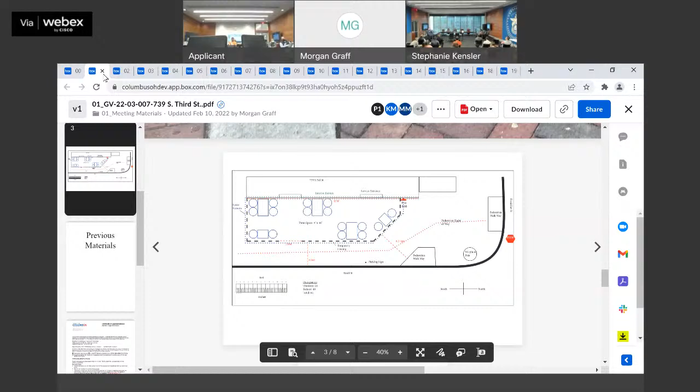Moving ahead to item number 2, GV-22-03-008, 1094 South 4th Street.

If you please raise your right hand. Do you swear to tell the truth, the whole truth, nothing but the truth? I do. Please state your name for the record. Christopher Brunner.

Proposed work is to replace the non-original sliding patio door on the rear of the structure. Applicant proposes to replace it with a white Marvin fiberglass exterior, finished wood interior sliding glass door, but is open to making the exterior fiberglass door dark bronze.

Staff analysis: the existing sliding glass door did not receive a prior COA, but was there when the owner moved in, in 2000. There is a record of a complaint being made in 1992 about a new sliding glass door installation without a COA, but there was no additional documentation.

Applicant originally proposed a vinyl sliding glass door as a replacement. Staff had initially reached out stating that vinyl doors are not approved within German Village and recommended replacing in kind for staff approval, or fiberglass, which would have to be reviewed by the commission. The applicant is willing to use a dark bronze finish.

Staff recommends approval, with any and all clarifications to be submitted to HPO staff for review and approval prior to issuance of a certificate, and that the applicant selects dark bronze or black as the exterior color. This is based on the German Village Guidelines amendments, door replacement, page 179. The following criteria should be considered in determining whether door replacement is appropriate: the door is not original or contributing.

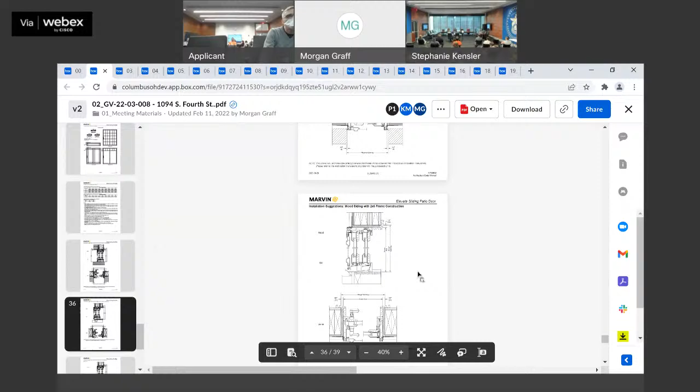Anything else to add? Any questions or comments from the commission? So is this a vinyl or a fiberglass replacement? The replacement would be fiberglass. The current door is, I think, steel. Okay, I wasn't quite sure where we were at.

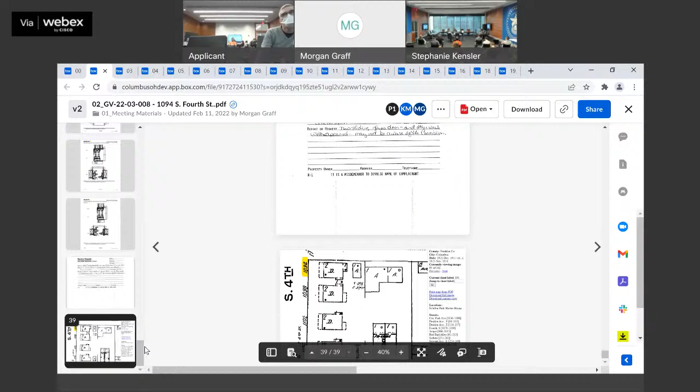I guess the other issue is the color? Yes, applicant is proposing white, but he's open to using dark bronze or black to match what's existing there. I'm not sure why these pictures got flipped upside down, but the question is, why would we want to match something that was not approved previously? And would white be better off? I didn't understand why white would be a problem.

Okay. Yeah, I would prefer the white. Motion.

Mr. Chairman, on item GV 2203-008, 1094 South 4th Street, I move to approve as submitted with a fiberglass door that's white. Second. Questions on the motion? All those in favor? Against? Ayes have it, motion passes. Thank you.

Item 3, GV-22-03-009, 1050 Jaeger Street. If all three of you would please raise your right hands. Do you swear to tell the truth, the whole truth, and nothing but the truth? Please state your name for the record. Joseph Wickham. Thank you. Stephanie Wickham. Thank you very much.

Proposed work description: applicant is seeking a variance recommendation for an existing condition. Code 333226C1, minimum side yard permitted, to reduce the minimum north side yard from 3 feet to 1.8 feet. And 333225, maximum side yard, to reduce the maximum side yard from 5.97 feet to 5.2 feet. Staff analysis: project was approved for design in July, number GV2107047. Staff recommends that commission recommends approval to the BZA as submitted. This is based on the German Village Guidelines, zoning variances, page 139.

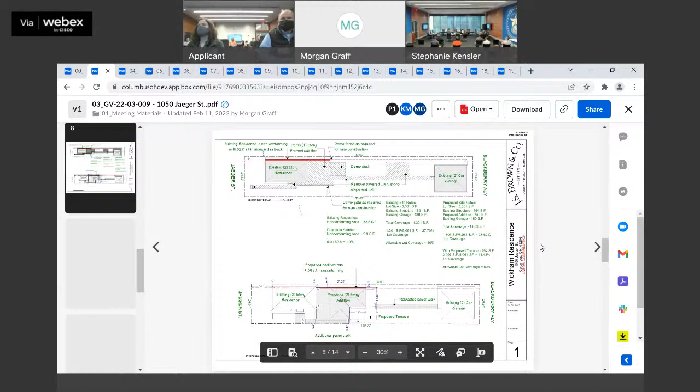Questions, comments from the commission? Mr. Chair, on item number 3, GV 2203-009, 1050 Jaeger Street, I move to approve as submitted. Second. Any questions on the motion? I will ask for clarification, but these are all existing conditions, correct? Yes. Take a vote. All those in favor? Aye. Against? Ayes have it, motion passes. Thank you. Thank you very much.

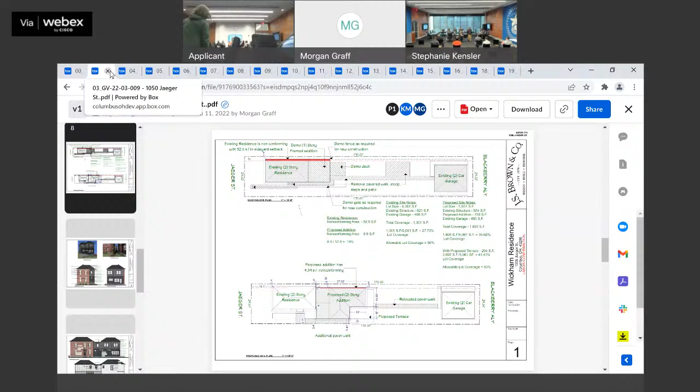On to continued applications. Item number 4, GV-22-02-007, 713 South Sixth Street. And if you both please raise your right hands. Do you swear to tell the truth, the whole truth, and nothing but the truth? I do. I do. And please state your name for the record. Suzanne Vennemeyer. Thank you. Mark Ruthermore. Thank you.

Proposed work description: removal of a blue spruce tree in the rear yard, southwest corner of the house, and grinding down the remaining stump. The tree was planted too close to the house foundation approximately 20 years ago. This posed a hazard to the foundation of the house and needs to be removed.

Staff analysis: commissioners requested at the past February business meeting to clarify if the applicant intends to plant a replacement tree in the same location. Applicant responded stating that they do have the intention of planting a tree in the future, but not in the same location since it will be too close to the house foundation. They plan on renovating the backyard in the future and will address it with that application.

Staff recommends approval with any and all clarifications to be submitted to HPO staff for review and approval prior to issuance of a certificate. This is based on 311613, standards for site improvements, letter. Anything else to add? Questions, comments from the commission?

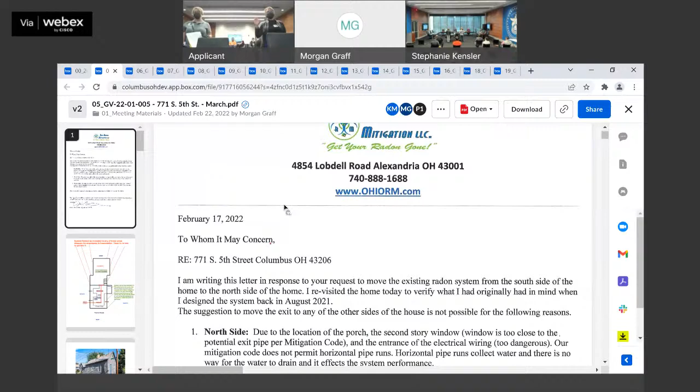You both please raise your right hands. You swear to tell the truth, the whole truth, and nothing but the truth. I do. Please state your name for the record. Jody Rhodes with Ohio Radon Mitigation. Patricia Janikowicz. Thank you very much.

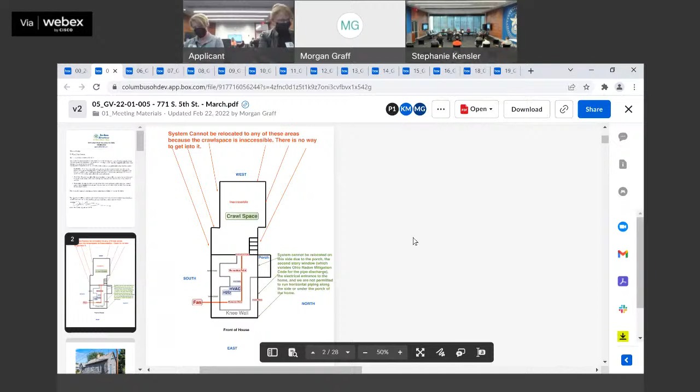Proposed work description: this application is a response to a code violation of a radon mitigation system installed prior to its COA being issued. The radon system has been installed on the southeast corner. Radon level is 10.3 on the first floor of an actively occupied living area. Applicant was told by contractor that the street side was the only option for installation due to the construction configuration of basement walls. Applicant intended to paint the piping the same color as existing shingles on the structure.

Staff analysis, the following is taken from the approved February 2nd, 2022 German Village Commission hearing minutes. Commissioner comments: commissioners asked applicant the reason the northeast corner wasn't able to be used. The applicant responded that the exit would have been too close to the electrical panel, as well as the exit pipe would be too close to the second floor window. Commissioners indicated that the street side is unacceptable for the pipe exiting to be seen.

Commissioners would like to see if there are any other options that could work. Commissioners asked if the pipe could exit the northeast corner, run along the exterior horizontally under the porch, and then exit further east on the building to place it further away from the second floor windows. Applicant could not speak to it at this point, but would consult with Ohio Radon Mitigation.

The commissioners asked at the past February business meeting if staff had received any additional information requested from the previous hearing. Staff informed commissioners that applicant had not submitted any new information and would request that information be sent prior to the March hearing. Applicant has since responded stating the mitigation code does not permit horizontal pipe runs. Horizontal pipe runs collect water and there is no way for the water to drain, which affects the system performance. Staff recommends approval with any clarifications to be submitted to HPO staff to review and approve prior to issuance of the certificate.

With the condition that the PVC piping be painted to match the color of the exterior siding. This is based off of CC 311618. Approvals required, letter C.

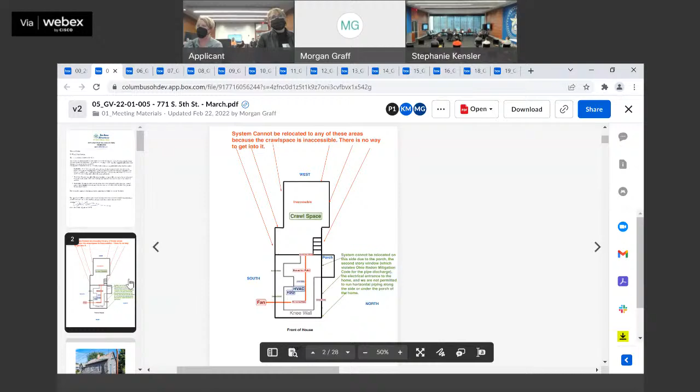And then, even then, the exit would violate our 10-2 window rule for the window on the second story of the house. Well, we were looking at getting it towards the back of the house, which there's a porch in the way. Well, we were talking about going under the porch or over the porch. I can't run the piping under the porch. And why would that be?

I'm not permitted to by Ohio radon mitigation code. That is Ohio Revised Code for Ohio radon mitigation. Can you tell me what that is, just out of curiosity? I don't know the number off the top of my head. We can look it up.

We have very strict guidelines. That's why the design of the system was done the way it was to begin with, because there just isn't any way to get the system exteriorly without violating our code. And if I violate the code and it gets inspected by the Ohio Department of Health, I lose my license.

I believe there is an option for running it up inside the house, inside a chase. That would require a lot of construction. I'm just bringing it up, just saying that is an option. Now, whether the commission wants to approve what you've done, that's up to them.

I'm just saying it is an option. That's a homeowner decision. It would have to be cut through floors, drywall, and roofing, and it would be expensive. I understand that, but it's doable.

My only question is, if we do approve this, I would ask that you contact staff and let them know what the code reference is, so we know in the future, because these things happen from time to time in the village. I can get it as soon as I get back to my office.

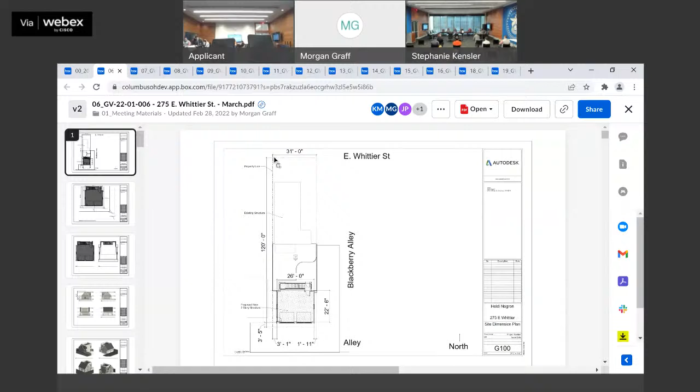Please raise your right hand. You swear to tell the truth, the whole truth, nothing but the truth? I do.

Austin Pope? Thank you. Heidi Negron? Thank you. Tom Stevenson? Thank you very much.

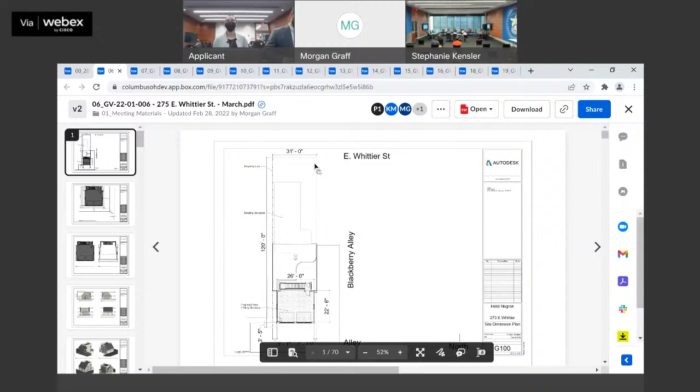Proposed work description: construction of a new 2-story wood frame carriage house, which will sit within the current property lines at the dimensions shown on the attached plans. Height to be 24 feet, below the average height of the adjacent properties which average 24.7 feet, with total lot coverage being 42%. The proposed carriage house will be set back 2.3 feet to align with neighboring properties and allow for a larger turning radius. Redesigned interior stair to be relocated to allow for 2 double garage doors.

These garage doors are to be 10 feet doors and centered on the back of the structure. Windows are recentered to show separation between the windows and the top trim detailing. Doors and windows have been aligned where possible. Carriage house facade will meet German Village requirements: smooth painted lap siding with 5.5 inch exposure, either Hardie board or similar. Windows will be 3 feet by 6 feet, double hung with no grids.

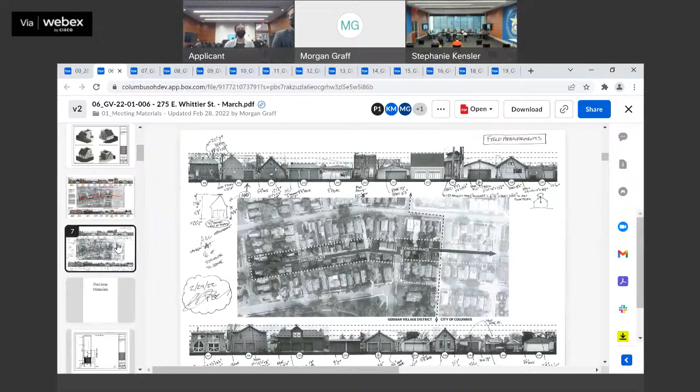Doors will be 3 feet by 6 feet 8 inches, 4 panels with a 1 foot 4 inch transom. Trim details to match German Village standards per submitted drawings. The existing wood fence is to be removed only to the extent of the new structure. Zoning and variances to be discussed at the meeting. At the past March business meeting, the Commissioner asked the applicant to provide verified heights measured by the hired architect prior to the March hearing. That has been provided. The following is taken from the unapproved February 2nd, 2022 German Village Commission hearing minutes.

Commissioner Thiel stated that he will challenge the height of the adjacent structures that have been provided. He states that 271 East Whittier Street, based on his assessment, is 139 inches, or 11 feet 7 inches in height. 281 East Whittier Street is 16 feet 8 inches in height.

Average height for 281 and 271 East Whittier is 14 feet 2 inches. 252 Reinhard Avenue is 12 feet in height. 256 Reinhard Avenue is 9 feet 7 inches in height. 255 Concord Place is 184 inches, or 15 feet 4 inches in height. Average height for 252, 256, and 255 Concord Place is 12 feet 4 inches.

Will not be counting the open lot next door to 281 East Whittier Street. Commissioner Harkey challenged the height as well, and based on his assessment, he received the same measurements as Commissioner Thiel. Commissioner Harkey still thinks that it's significantly taller in comparison to all the alleyscape.

With new information presented, Commissioner Foley stated that his main issue on taking action for this application is the massing and verifying the height. Commissioner Farrell questioned whether both commissioners and the applicant are measuring the same way. He was not sure where both should be measuring. Commissioner suggested a site visit between staff, Commissioner Harkey, and the applicant to verify the heights in person.

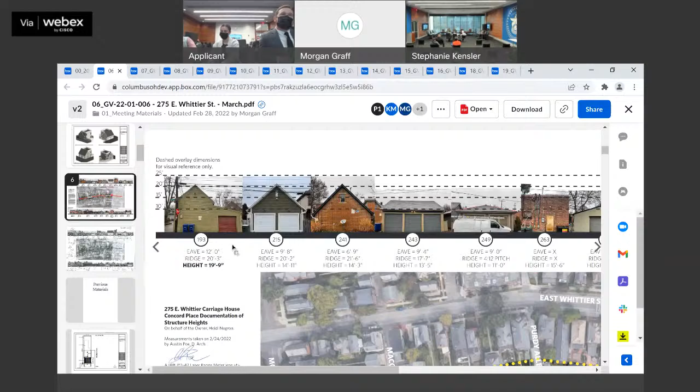So, quick question. As far as we talk about the Blackberry view and views of the neighboring properties, correct? So who's viewing that side of the elevation? I don't understand your question.

From Blackberry? Yeah, go ahead, Brent. You're asking from Blackberry? Yeah, I think anybody walking down Blackberry or driving down Blackberry would view that side, right? Is that what you're asking?

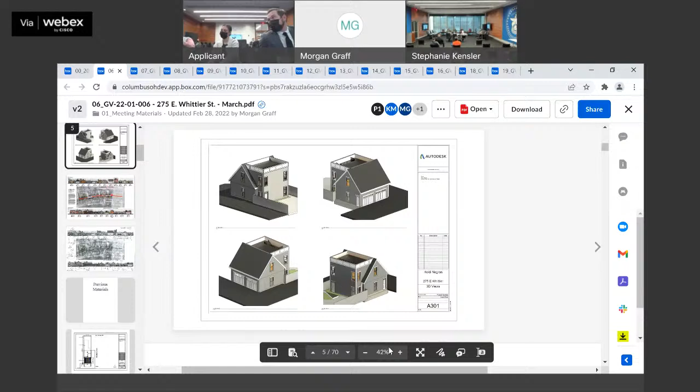So I guess as far as when I think of the properties impacted, I think the properties directly adjacent to the site—directly to the east, directly to the south, directly to the west—and seeing that, our average height is under the foursquare building. It's almost the exact same height as the 255 house directly across the street, which I'd say is the most impacted, right? They're going to be looking out their window at it.

But by zoning code, your building's 24 feet tall. It's not the average. Zoning code for height for a garage looks at from grade to the highest point of the roof, not the average, the highest point.

I do think there is something to what Austin is saying, that we don't have the properties adjacent on Blackberry to review and compare. And if you're to Anthony's point—I don't know if it was Anthony or Ned who said that—the back is still what it is, it doesn't have the pitch. I think the back has to be compared to the building on Blackberry, as you view it from Blackberry, not as you view it from Concord.

From my standpoint, I think we got a little caught up last time because it was how many things are we varying. I think they've done the work, they're only varying massing now. The detailing, the doors, the materials and things have all been modified.

In consideration of the sloping, I feel much better about this application myself. That's where I am, and I don't see anything jumping off.

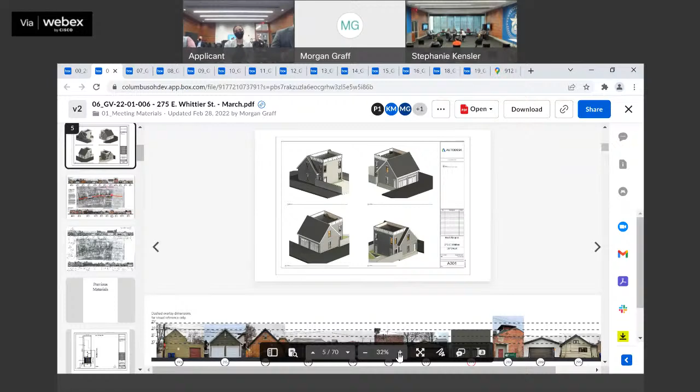So is it just so big? I'd like to point out a distinction maybe between the guidelines and the requirement of compatible as viewed from the street. The guidelines are saying, if you read them carefully, that the height of the new building should fall at or below the average height of the surrounding structures.

So to me, that would mean the houses that are also surrounding it. And then there's another requirement in the code that says the height as viewed from the street will be compatible with the surrounding structures. So I can understand there's one part of the requirement: when you're looking at it from the street, it needs to be compatible with all the other structures that are around there.

To me, we're fitting within that compatible—we're compatible from the view of the street, which is a different requirement than whether it meets or exceeds the average. So I would say using the house across the street is using the exception to the rest of the buildings.

Because you're changing the whole standards then, at that point. And we've always compared it to what's adjacent along the street front and not what's behind—unless we want to change that. So that only changes everything. That changes a lot of what we've ever based everything on. I'm not saying that that's wrong,

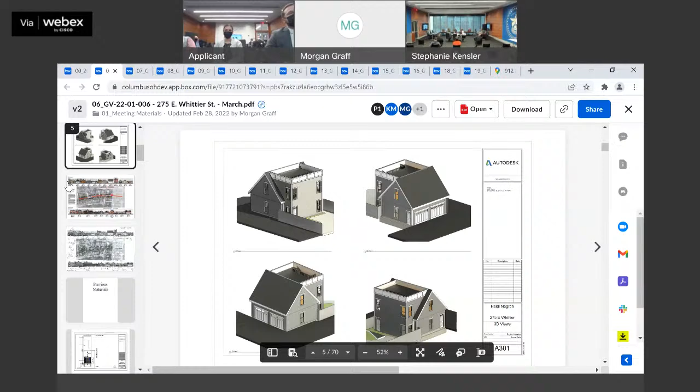but then when I look at 232, it's obviously a structure that was approved and is taller than all the garages that are on that alley. So I don't understand how that one can be approved. 232? 232 Reinhard, that's Reinhard.

There was an original garage there in 1910 and 1920, and they were just replacing around that same square footage. I would say more mass from that time as well. But it's also a Queen Anne home that had a carriage house in the rear, so they were replacing an old carriage house with a newer carriage house.

Can we just point out the structure directly to the west—I'm all in favor of baselining design off of... I don't want to make any knocks on that structure, but I don't know if we want to set our standards based on that structure on the west. You mean the garage? Yeah, that's not...

It's a lack of character, no design content whatsoever.

Oh my. What's that? It said, oh my. What? It said, oh my. Oh, right.

Obviously, you don't have the benefit of the full commission here, which is a challenge, because if I'm reading this right, we might be split. Which means if we vote, it's a non-pass, right?

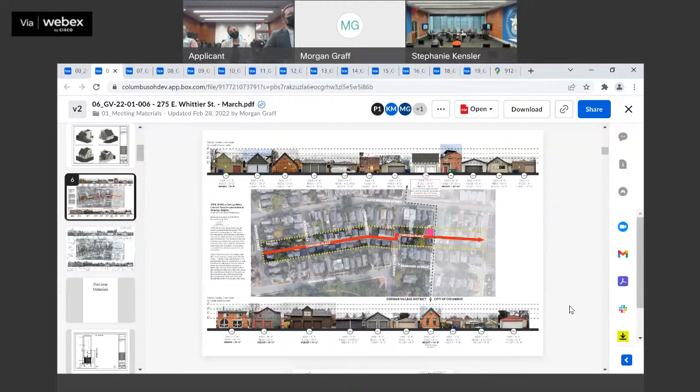And I'll state that if you look back at the record, I wasn't here two meetings ago when that conversation happened. I have stated that the detailing of a railing on the third floor to create a third floor patio is causing, in my opinion, detailing inconsistent with what you would see in the village. And that railing is causing a height increase on the pitch of the roof, which is exacerbating the height issue. I've been consistent on that position the entire time through, so it's nothing new for me. Your statement is not correct.

The height of the railing is not driving the architecture. That detail was commensurate with detailing similar to the type of structure it is. When you think about a program and how you design, you put a program together and then you put the design together. Each time we met with the commission, we tried to shrink this down so we could still meet the program, and everything got slightly compromised.

I think the architecture was enhanced in the process. I told Heidi, at the end of the day, I believe this is better than what we originally came up with, and it enhances the value. The piece of crap garage next door is going to be hidden now because it's a beautiful building across the street. So this is a much more enhanced architectural design, but the height isn't determined by just having that detail. It's all part of the program that has been approved in German Village before.

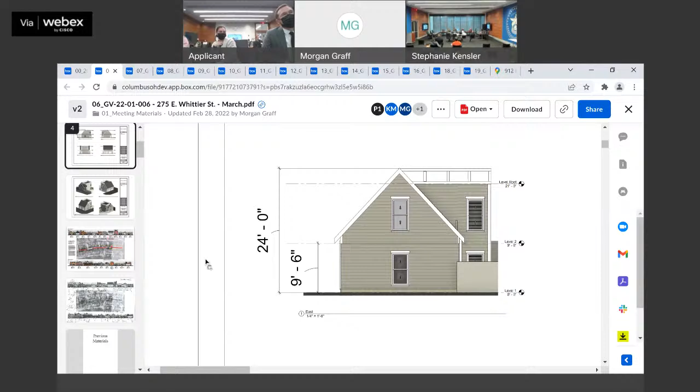So could we not treat it, instead of calling it a railing, could we treat it as a frieze in the corners? That's what it is. Right, we're talking railing, and I think in the typical sense of how you think about a railing, but if it's integrated into the design...

Once again, from street level, that's part of the elevation. Would you lose head height if you were able to just lower the back portion, trying to get towards what Anthony's saying? If you were able to just lower the back portion a foot, would you still have the head height you need for the back section?

So it's a technical question, right? I don't know the structural member sizes, et cetera. Yeah, the structure, I've been talking to Dan Gears about the structural member size. Everything was already short. As we started to do this, we were trying to keep everything.

Would that get you there, Anthony? I think it would. So if you were able to, you would keep the deck, but the railing would just be a foot or so lower than the ridge. That was accomplishable, I think, what Anthony's saying. And then you're not losing program if you can make that work.

Jimmy, right? You're just, might be gaining cost because you might have to do something a little more structural. Yeah, like an LVL instead of a regular timber.

But Anthony, I'll do that. But if they amend the application to say that, would that be enough for you, or do you want to see it? This applicant's been here multiple times, seven times maybe. Would the intent be to have the elevation? We can pull that up.

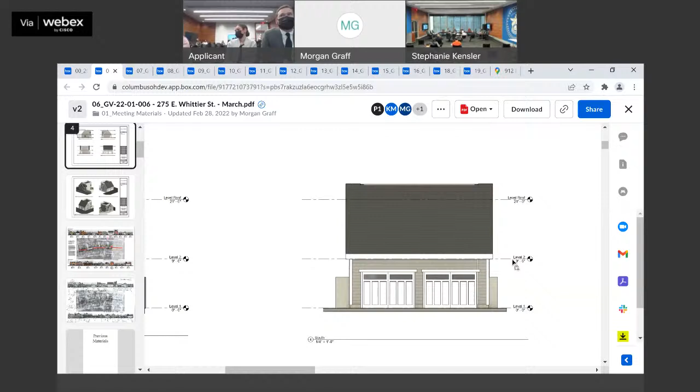Let's pull up the elevation. I think that's offside. The previous design had less distance between the top of the first floor and the top of the second floor, so there was more vertical space between level 2 and the roof level. It didn't represent the actual structural size, which was the problem after talking to Dan Gears about the structure.

You know what I mean, to get the spans, that's what happened. It became, you know, this was all conceptual. After talking to Dan, we had to adjust. So if you were able to lower this a foot or so, Anthony, so it just didn't align exactly with that, are you starting to feel good about it? I think that gets me back into the typical detailing we would see as far as engagement of roof lines.

And then it's just simply the height. That's the only thing. How does the applicant feel about that? If we leave here with a vote, I'd lower that.

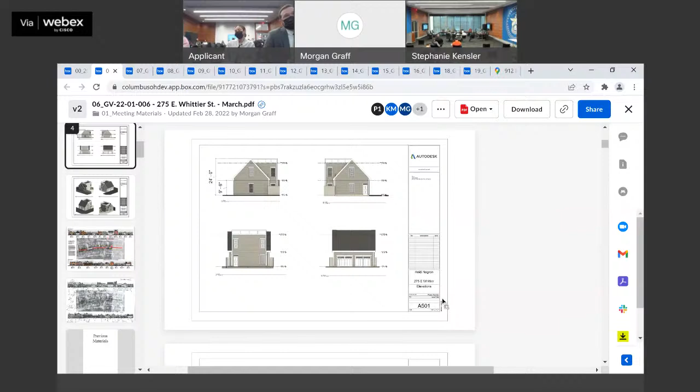But you can't, you're still going to have to meet fire height on that. So no, you'd have to lower the roof and lower the railing. That's why I was asking if there was headspace in there. Yeah, it's 36 inches for residential, commercial's 42.

Well, the OCC is 36, 42. You got it. And then to clarify, is the railing design intended to be that kind of panelized system, or what's the railing want to be? It's hardy, it's not really railing. It's more of a frieze detail. We integrated, if you remember, we pulled the railing out, integrated into the architecture.

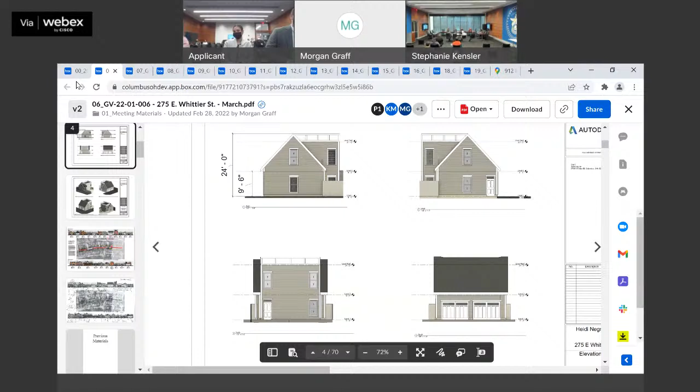You voted against me twice in one week. Sorry, twice.

Before we continue, those updated drawings, just the lowering of the elevation, if they could be sent to me for final approval. Absolutely, thank you very much.

Thank you so much for all your work. It's better, yeah, it's the better building. I'm trying to figure out what the other one was. Oh right, that's the plan for... gotcha.

All right, moving on to item 7, GV-22-02-009, 617-619 South Lazelle, and 618-620 South 3rd Street.

Please raise your right hand. Do you swear to tell the truth, the whole truth, and nothing but the truth? Thank you, and please state your name for the record. Jeremy Andrews. Thank you very much.

Order. This proposed work: description, applicant's HOA replace fencing between the properties at 617, 619 South Lazelle Street and 618, 620 South 3rd Street prior to COA approval. Replaced old wood fence with new wood fence. Fence is simple design, board to board with dog-eared pickets, unpainted and unstained.

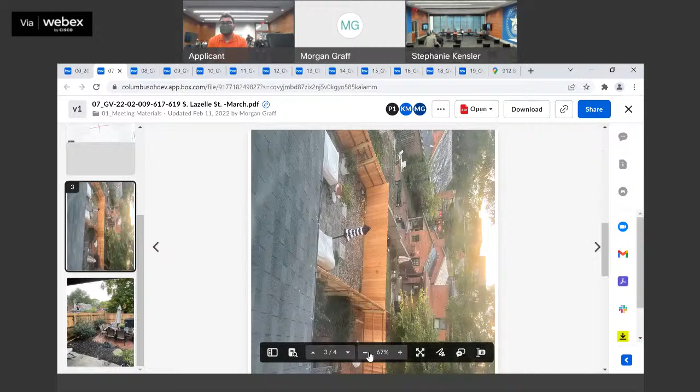Staff analysis: commissioners requested at the past February business meeting for applicant to clarify ownership of the property, to determine if the fence pickets are facing the right orientation of the applicant owner's property. Commissioner McCoy reiterated that GVC does not allow dog-eared fencing.

Typically, if dog-eared fencing has been installed, the commissioner requests the applicant to cut the top of the pickets to make them straight cut. Staff recommends approval with any clarifications submitted to HPO staff for review and approval prior to issuance of a certificate, with conditions that the pickets face the correct way, that the dog ears be trimmed to make flat top pickets, and painted or stained with opaque stain per the GVC guidelines. This is based on the German Village Guidelines, exterior consideration fences and walls, page 118, numbers 3, 4, 6, and 7.

Anything else to add? Nope. All right, questions, comments from the commission?

I think first off the bat was the conversation about clarifying ownership of the property for the applicant. So from that photo, which is sideways unfortunately, can you confirm which property or properties are owned in relation to these front two? If you're looking at the bottom one, that's my property at 617, owned by me. And the one to the left, at the top, with the black umbrella up, that's 619 South Lazelle, owned by my neighbors. Now the properties are all maintained by the HOA.

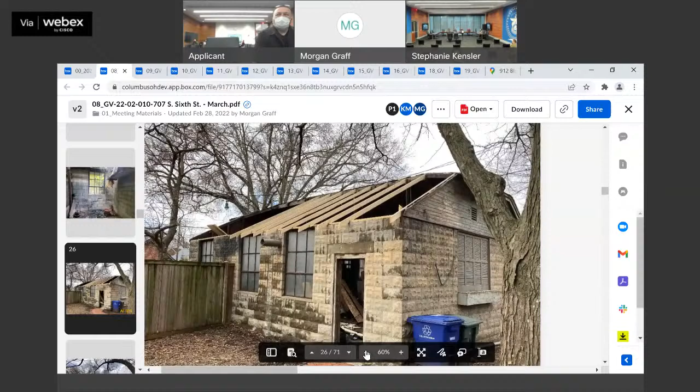From what the contractor originally submitted, he was going to install a gable. So that's what I was basing this on from these submitted photos. So do we have a clip end on the end of the garage, or do we have a gable?

Everything's the way it just looks right there. The contractor told me they have all the permits, and I was supposed to go ahead and do that. Then once I found out they have no permits at all, I fired him, but now I'm trying to clean up this mess. You're right. To me, I think it should be the clip gable to go back in.

Just for my clarification, that is showing the backside of the garage? Right, photos from before. It's hard to tell because of all the plants and everything. Yeah, I think it's the same gable end. So the photos from before, page 26, sheets back - that's the backside.

It's not the backside, that's looking from the front to the side. But I think it's the same gable end, just turned. But it's the same tree, right? Yep.

I'm confused about what we're missing. So he wants to put the gable like this, and it's got a little hip on the end. Gotcha. So on page 26, it's hard to tell if that's there, but to me it looks like it should go back.

It looks like it's still there. It may be, it's really hard to tell because of that branch. It is still there. It is? Actually, you're not trying to change the shape at all.

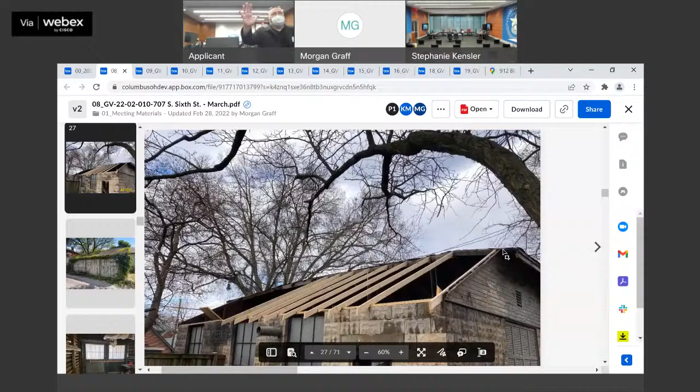Okay, outside, just want to bring it back to the original, that's all I'm asking. Yeah, if you go back one picture, you can see it's still there to the right of the tree, in the other picture, one back. Yeah, you can kind of see it there on the right.

Okay, I'm assuming it comes across, and I'm just going to do it. So I think it's just an illusion of the picture. Yeah, okay, so as long as that's staying the same, we have no problem with that. What about the window, with the second floor window, which I don't think we have a picture of, do we?

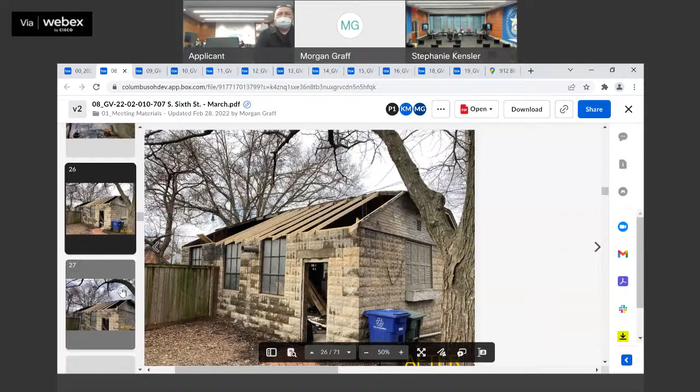Yes, it's at the end. Maybe - yeah, keep going down a step. Maybe not the very end, I take that back, close to the end. That's it, page 61, the one that's there.

So the window - and the sashes are still on the property. Right, we discussed that, yes. I think it's the original window, it would fit there, but I can't confirm. We have a Columbus landmark coming in tomorrow night, I'll have to see if that's the original window.

So you're willing to put the window back? Sorry? You're willing to put the window back? Yeah, I mean, if I have to, I'll do it. So for the applicant's sake, question for the commission: if that's not an original window, would we want a window going back in its place, or are we okay with it being boarded up like this?

If it is original, put it back. If not, it's okay. That's my take, I agree with that. Make sense? So when we make the motion, we can put that into the motion, that the landmarks analysis should go to staff, to determine.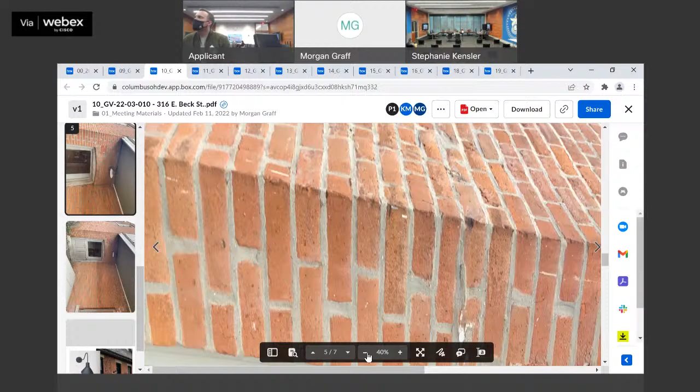Staff had asked the applicant to provide measurements of the existing front door light fixture. The applicant responded that the existing light fixture is 17 inches tall by 10 inches wide and 11 inches deep with a 9-inch backplate. Staff recommends approval as revised, with any clarification to be submitted to HPO staff for review and approval prior to issuance of a certificate with conditions. This is based off German Village guidelines, site lighting, street furniture, pools, fountains, and gazebos, page 122, number 3.

Anything else to add? Nope. Questions, comments from the commission? Mr. Chairman, item number 10, GV 2203-010, 316 East Beck Street, I move to approve as submitted. Second. Question on the motion?

I would like to clarify that my vote is because the gooseneck fixture that's there is being replaced like for like, and it's in a non-primary location. Can I ask for clarification from the commission - are we approving the other lantern choice for the front door as well? Yep, okay.

All right, we'll take the vote. All those in favor? Aye. Against? Ayes have it, motion passes. Thank you very much.

Item number 11, GV-22-03-011, 768 City Park. One for 768 City Park, one for 654 South Grant. We'll table that one here. Number 12, GV-22-03-012, 654 South Grant Avenue.

Please raise your right hand. Do you swear to tell the truth, the whole truth, nothing but the truth? I do. Please state your name for the record. Lisa Trot. Thank you very much.

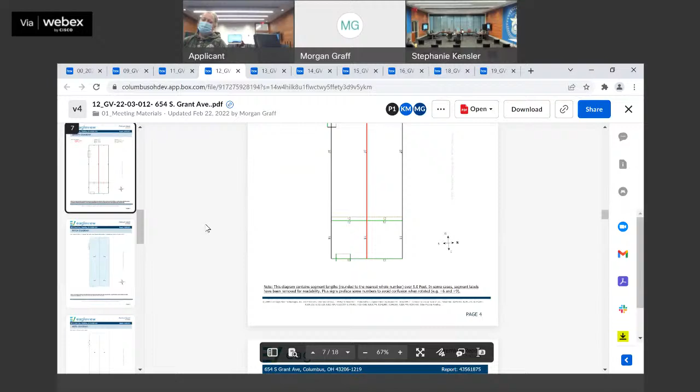The ridge is to be capped with a metal ridge roll painted tinner red or gray, and venting is to be performed on the roof ridge underneath the metal ridge roll via cobra vent or comparable. This is based off the 3116.11 standards of alteration, number 6. Anything else to add? No. Questions, comments from the commission?

How do you know that the venting is required on this roof? I do not, I'm just basing it off the guidelines. It was not indicated in the application, so I was just providing it just in case. So I don't think that's a requirement, or I would suggest it's not a requirement, because the venting may not be required on this roof. If it is, that's up to you.

Are there questions or comments? If not, is there a motion? Item number 12, application GV-22-03-012, 654 South Grant Avenue. I move to approve as submitted with the stipulation that there is a metal ridge roll painted tinner red or gray, and that you are amending it accordingly.

Second. Any questions on the motion? All those in favor? Aye. It's unanimous, ayes have it, motion passes.

Thank you, thank you. It's not even late. I am losing it today. It's fine, I might be losing it too. Who seconded that motion? My apologies, I did. Okay cool, thank you, it's over here somewhere, behind the computer. You came. That might be behind the... why.

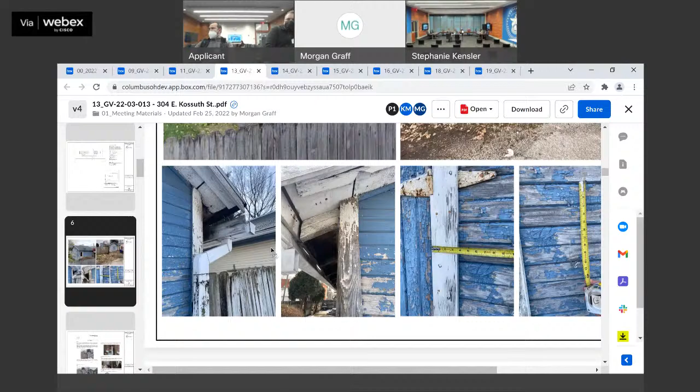New true exterior rustic smooth siding, 1x6 Boral, to be installed and painted to match the existing house. Trim board, true exterior smooth, 1x4 Boral, painted white. Fascia, true exterior smooth trim board, 5/4 by 4 Boral, painted white. Soffit, true exterior double bead board Boral, painted white at gable ends, with exposed rafter tails plumb cut and painted white. Install new asphalt shingle roofs, CertainTeed standard 3-tab nickel gray or other GVC approved roofing shingle.

New white OG metal gutter and downspouts. Existing door opening will be relocated. New door will be 30 inches by 80 inches, wood door per GVC approved product list. Existing window opening is to be enlarged with a new 48 inches by 30 inches fixed window per GVC approved product list. Enlarge garage door opening and install a new motorized 9 feet by 7 feet white insulated steel garage door with windows, or an approved GVC alternative.

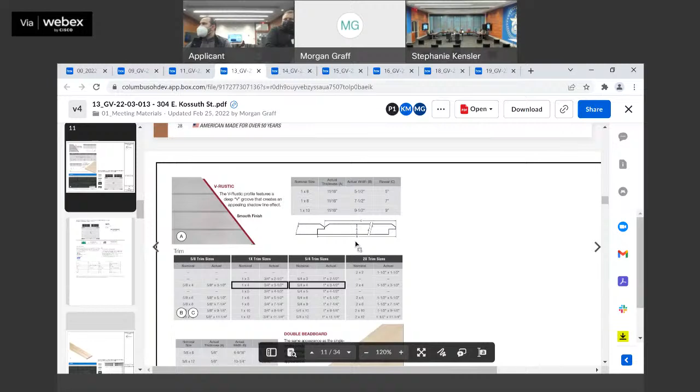Remove existing wooden privacy fence and replace with a 6 feet wood privacy fence. Fence to be straight cut, not dog-eared or stockade, with finished face facing, and all stringers and posts on the inside. Fence to be painted or stained. Applicant proposes to add a concrete parking pad to the south of the garage.

Staff analysis: on February 3rd, staff asked applicant to provide additional information with their application. We requested applicant to provide existing elevation drawings of the garage to indicate the existing openings for comparison to the proposed enlarged openings. Additionally, staff asked to verify the siding replacement, with existing reveal being a 2.5 inch exposure. Applicant responded that after their contractor analyzed the siding, they unfortunately concluded that the existing wood siding cannot be salvaged or reused once removed to stabilize the frame.

However, applicant revised their application to show the siding being replaced with in-kind wood. Staff also asked for clarification on the finish of the proposed garage door, and would recommend not including the faux hardware on the exterior. Applicant responded that the finish is steel with faux wood grain and would remove the faux hardware from the door. At the past March business meeting, the commission requested staff to send the applicant approved alternatives of garage doors in lieu of the proposed door, which staff has submitted to the applicant.

Applicant has responded stating they have reached out to several vendors and stores that relate to the samples given by staff and will not be available for 30+ weeks.

Applicant has provided a brochure of an alternative garage door model for additional consideration.

Staff recommends approval as revised, with any final clarification to be submitted to HPO staff for review and approval prior to issuance of a certificate, with conditions that the original window, man door, and garage door opening size remain. The garage door is to be selected from the examples sent by staff or similar for final approval in lieu of the proposed garage door. Additionally, the original siding is to be repaired and replaced in kind when necessary.

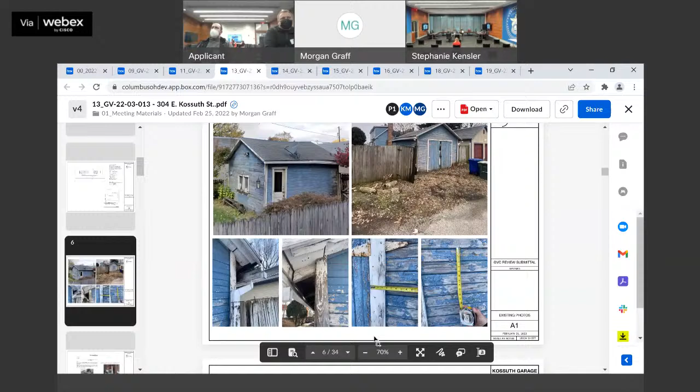We did find some alternatives for composite doors, which is what Morgan had sent you, and you mentioned you reached out to vendors and had supply chain issues. We understand all that. We would probably need to see a sample of that door.

When it comes to faux wood, it's the grain typically - a wood door wouldn't have a grain texture to it, it may have a look but not the texture. So we need to see a sample of what that proposed material is going to be to make a determination of whether it's appropriate for the village or not.

Or alternatively, if you know of an installation of one of these doors elsewhere in the neighborhood or adjacent neighborhoods in Columbus, we can always pop out and take a look at it. I don't think the commission would be - and this is me speaking - approving an alternative door without having at least seen a sample or an install condition.

Thank you for that explanation.

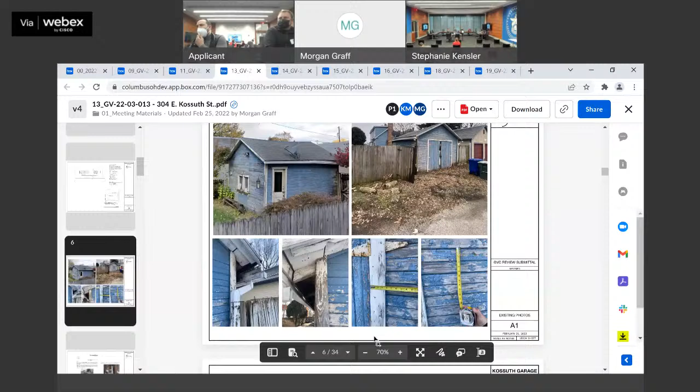The sample - I think after the business meeting, I reached out to the garage vendor and they provided a new sample, which I think is included in the package. And there's an optional upgrade to place either walnut or mahogany.

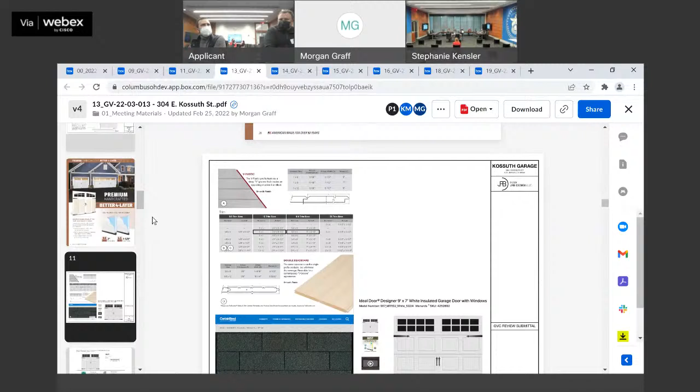If you keep going - like a true wood overlay? Yeah. Keep going down, it's not this garage. Yep. Yeah, it's on that page. It's hard to tell - oh, but there's the different colors.

I'm not necessarily asking for you to do this. I think it still comes down to the texture. Oh, okay, so we have to see the texture of the panel, a physical sample chip kind of thing. Or again, an installed condition somewhere that we can go look at.

But what we could do, for your sake, is discuss and vote on everything else. We can break out that garage door and continue it if you'd like, that way it's still on the agenda next month. We can go from there, so at least you've got something to move forward with. That'd be fantastic, I think. That'd be great. All right, we can break it out later if we want to continue discussions.

Any other questions or comments on the rest of the application? Yeah, I'm sorry, I'm having trouble with my laptop.

Thank you. So the question on the garage door is because of the 30-week delivery, you're asking for a deviation from the guidelines? Is that my understanding?

They're trying to find something similar to what we've approved that isn't on the list, to help with the timeline issue - a non-wood option. I think the ultimate goal, since it's a citation response and something the client's keen on getting fixed, is that we want to get started. Whether that's with the structure while we wait for the door, the more things we can start with the contractors, the better.

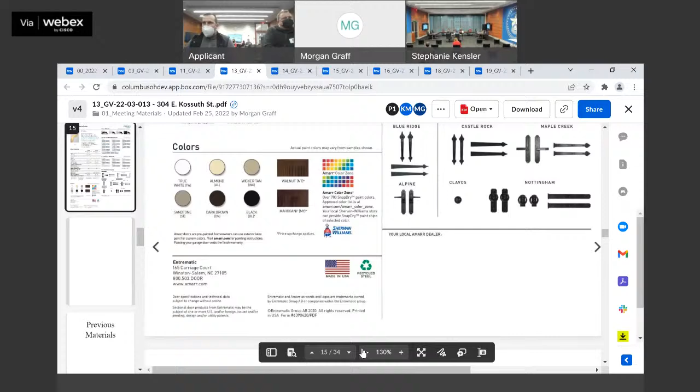While they're looking at that, were you intending to do wood siding in lieu of boral, or did you want to go boral and we're offering wood siding? We're willing to do the wood, we're proposing the wood. Use what they can and replace as they're going. It's a little unknown until I start digging into it, how much we can keep on the building while they push it back into place.

There's a note about the door - the idea is that door would open into the backyard, which has had some security issues already on the property. So that would give it another layer, being behind the wood gate with access from the backyard. Moving the door to the rear and then the rest will get wider.

Oh I see, because you need to move the door in order to get the other space. You can move the fence back, I see. I was looking at the original at the time. It's a change, but I get it. And it's not visible now, and visible after. That's a good point too.

So we're just going to modify this, right? Modify and then continue the garage door. Split the garage door out, continue that one, and then vote on the rest.

Was there a motion to split the application into two? Go ahead. I was hoping you'd do it. Motion to split item 13, GV-22-03-013, 304 East Kossuth Street, into two applications. The entire application minus the proposed garage door would be item A, and the garage door itself would be item B. Any questions, or is there a second?

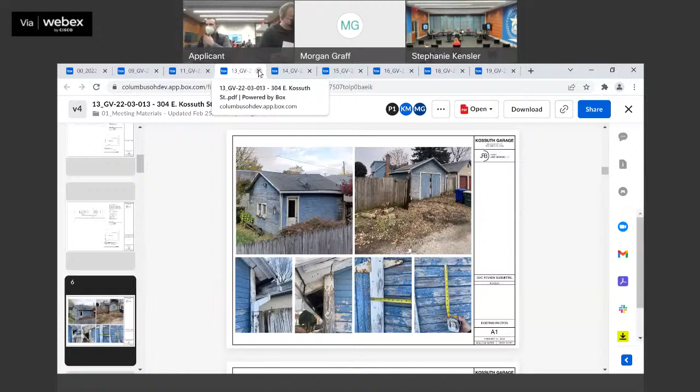All right, moving on to item 14, GV-22-03-014, 35 East Sycamore Street.

Raise your right hand. You swear to tell the truth, the whole truth, and nothing but the truth? I do. Please state your name for the record. Casey Burns.

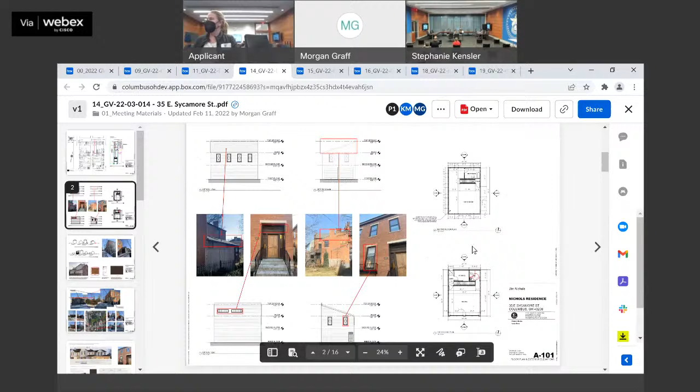Proposed work description: applicant proposes a detached two-story carriage house. New structure includes a garage and bathroom on the first floor and a bathroom on the second floor. Height of the new structure falls within the average of the existing building heights along the alley. Finishes have been selected per German Village Commission guidelines and are outlined on the attached plans. No variances or zoning changes are required, and the new building abides to all setbacks.

Staff analysis: the following is taken from the unapproved February 2nd, 2022 German Village Commission hearing minutes. Commissioner comments: commissioners asked if there would be a bathroom and kitchen in the proposed building. Applicant responded that there would be no kitchen or kitchenette, only a full bathroom. Commissioner asked applicant to verify if the new structure is an addition or an additional structure on the property. Applicant verified that it is an additional structure that's detached on site.

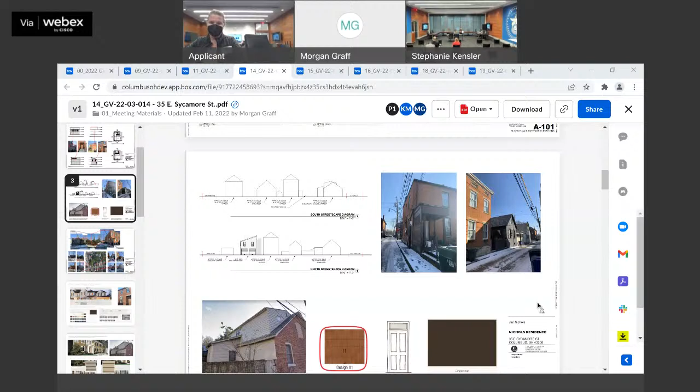Commissioners requested a 2D elevation of the proposed structure along the alleyscape to understand massing and height. Commissioner commented that the whole street is residential buildings, and suggested looking into the variances that will be needed for the structure as well as the property, including existing additions. Applicant presented two separate options of style and design and asked commissioners which one they would prefer.

Commissioners responded stating that the applicant should proceed with the one they think is most appropriate and how it coincides with the street. Staff recommends the commission offers feedback on design and recommends to continue the application. It's based off of 3116.12 standards for new construction, German Village guidelines.

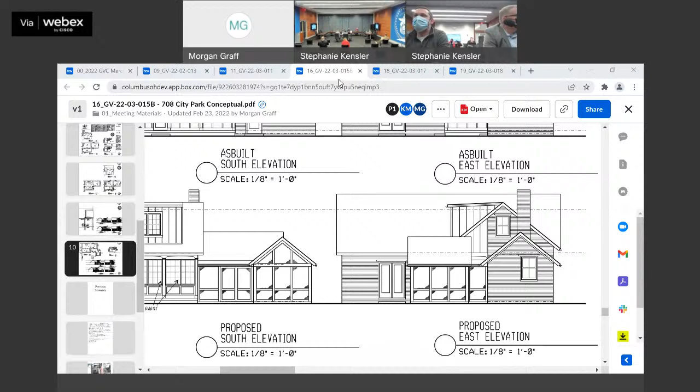GV-22-03-017, 595 South 3rd Street. Please raise your right hands. You swear to tell the truth, the whole truth, nothing but the truth? I do. Please state your name for the record. Randy Roberti, Design Collective. Wayne Scheck, Cameron Mitchell Restaurants.

Proposed work description: applicant is proposing to expand existing restaurant patio, and proposing to construct a new carriage house on 3rd Street to be used as a utility building.

Staff analysis: applicant initially reached out to discuss the design with staff around the beginning of January about moving their dumpster onto their lot. The dumpster is currently being stored in the rear of the adjacent property, 583 South 3rd Street. Staff had advised applicant that we would not recommend building a carriage house in the present space since it would detract from the overall landscape of 3rd Street.

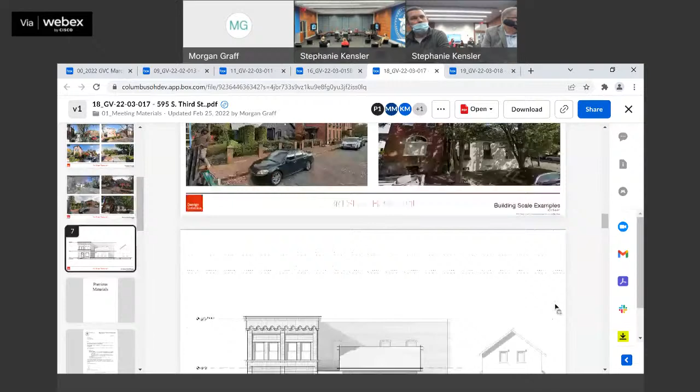Staff recommended maybe a smaller structure in the corner, or to build a screen around the dumpster since that is typically seen in German Village. Staff also recommended providing an existing site plan and elevation, and to discuss with zoning prior to review.

Applicant is currently in discussion with BZA and zoning. Zoning recommended that since removal of on-site parking is being proposed, a parking study will likely be required by the Division of Parking Services, and recommended to determine if other variances will be needed for non-conforming conditions.

At the past March business meeting, Commissioner requested Sanborn maps to be added to the meeting materials, as well as to state that parking will come up in conversation during the March hearing. Sanborn maps do show a structure that was there prior to 1950, but that structure was a 1.5-story dwelling. Staff recommendation: staff does not support the design and infill of a carriage house along 3rd Street.

We would recommend screening the dumpster to solve the dumpster issue. Commission should offer design feedback that can be utilized by the applicant to further refine the proposal for review at a future GVC hearing. This is based on 31-16-12 standards for new construction, letter F, G, J, K, and 31-16-13 standards of site improvements, letter A. No action is required.

Anything else to add? Yes, please. Do you mind flipping back to the existing start of the presentation? Yes. Stephanie is my content controller.

Thank you, appreciate you guys having us tonight. Just wanted to quickly give you a little orientation to what our goals are here before digging into some more specifics.

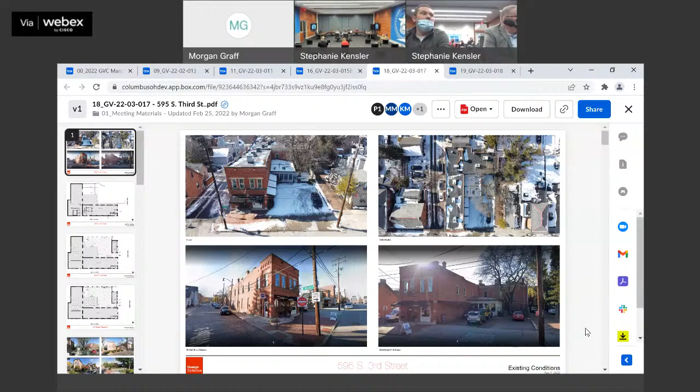And then the trash on the adjacent property is a challenge - it's currently sitting there, and the adjacent property owner does not really want that relationship to continue in terms of shared trash. So it needs to relocate over onto our site, but the challenge being, where do you put it when we start to look at it?

So our goal today - we're really just starting this project, we haven't dug in very far. You saw the elevations - they're not really developed or design detailed, more of a massing study at this point to start the conversation with you guys.

So this proposed plan that you see on the screen is reflecting a couple things. We are reworking the grading of the site after we build this new expanded patio in order to create ADA entry and an additional code compliant egress exit from the back dining room, so we're solving some of the life safety and accessibility issues currently.

The first question we'd ask of you, beyond your overall feelings on the project, is about the patio expansion itself. That would be the first variance we would need - the ability to expand the patio. It's currently only that top left little sliver of the patio on the plan, not very usable. The large tree that's there takes up most of that space, which we are keeping. So it's not great - our goal is to expand that patio, make it larger, more experiential, and better from all perspectives, better for the guests that are there, better sight lines from the street driving by overall.

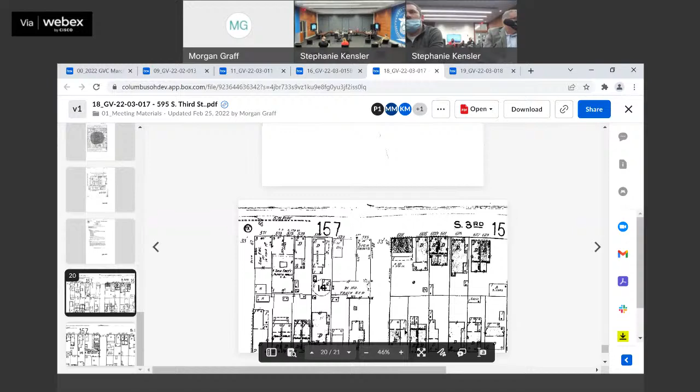I would ask one question before I turn to the other commissioners. The historic Sanborns do show, up that last page there, a building oriented, say, perpendicular to Third Street. What you're proposing is parallel to Third Street.

To me, I'd be more likely to approve something if it was in more of the historical context. This is a signature building of the village. It's been what it is for a long time, and not a whole lot of the exterior has changed aside from that one little porch addition. So keeping that visual along Third Street, I think, is important.

In response to that, real quick, honestly, our footprint is similar in width and location to what was there historically. It was just much deeper. So there might be a little variation, but the width of it actually is relatively similar to the historic building.

But the pitch of the roof, we're open to pitching the roof in any direction. It's more of a, we can even expand that backwards to make it add some patio covering to make it feel deeper. There's some things we can do to do that. But yeah, roof pitch is not set in stone by any means.

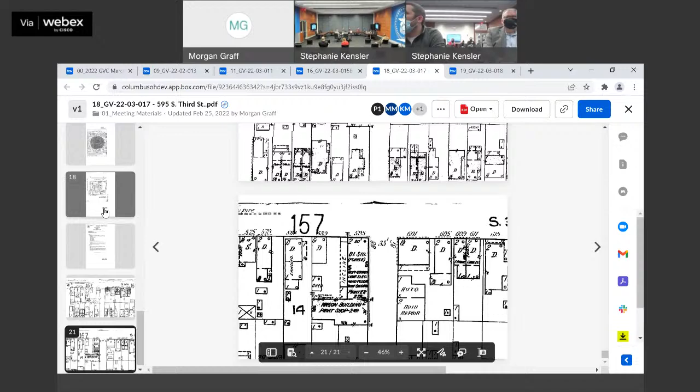So maybe I'll kick off some comments here. I used to go to G. Michael's a lot, so I spent a lot of time in the restaurant patio, and experienced really wasn't a great parking situation.

So I kind of appreciate on Third Street, which I think is a very active street. I mean, this is right down the street from Stauf's, blah blah. This is a very pedestrian area. Trying to make this a pedestrian space doesn't bother me.

And I think the parking situation, every time I used to walk by, every time I saw people, both people that were going to G. Michael's were actually using the valet if they were driving, which is right in front. So losing the parking for me is not a huge issue.

There's something to actually having an activated pedestrian patio, and that's very similar to what Stauf's has and others, and we just improved the temporary patio to the old Max and Erma's space. And that feels good for Third Street.

There's something to the nature of the way the building's oriented that makes it feel like a barrier, I think, is what's bothering me. And I actually applaud the notion of making the building accessible, making it more open to more patrons. So I think there's a way to orient the building so it doesn't feel like it's closing it off from the street, but maybe opening up to the street would be preferable to me. That's just kind of my initial gut reaction.

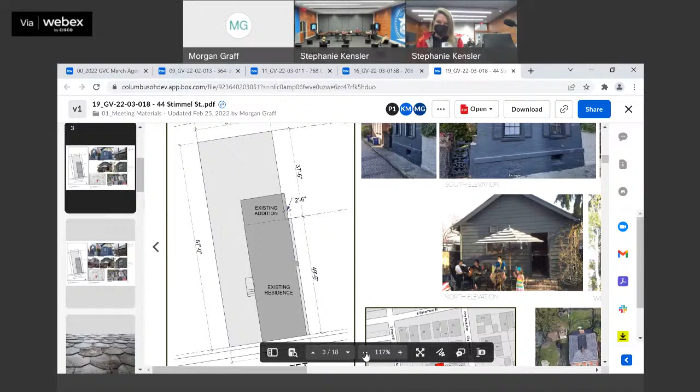Proposed work description: applicant is proposing to construct new dormers consistent with the scale, form, and appearance of the existing dormers. The dormers will be located on the west elevation and adhere to the GVC guidelines. Replace the existing slate roof with a new roof. The client has reviewed with the roofing company and will provide a letter. The new roofing material will be a GAF Slateline, English gray, which is from the approved shingles list.

Proposing to vault the ceilings and extend the roof over the rear part of the house. This will require the removal of the existing balcony and door on the second floor, remove the brick chimney on the west elevation, and construct a new chimney on the west elevation.

Applicant proposes window replacement. Windows will be selected from the approved windows list. Replace the existing north elevation rear door and window with a double door, which includes a new transom window and two side lights from the approved windows list.

Rebuild a portion of the west wall and replace the shiplap siding and install a new window to match the existing. Repair the exterior and interior spalling brick on the east elevation, as well as repairing the exterior cellar door and cellar stair cover. Staff analysis.

At the past March business meeting, the commissioners requested the applicant submit additional photos to show the current conditions of the slate roof. Applicant has provided both the photos and the assessment from a Second Estimate Limited. For the proposed vaulted ceiling and removal of the second floor balcony, commissioners asked applicant to reference the balcony in the drawings since it was unclear from the provided drawings. Commissioners also requested clarification on the west elevation chimney, as well as additional information about the windows, if they are original or replacement.

Clarification has been provided by applicant with revised materials to indicate the removal of one west chimney, as well as where the second floor balcony is located, and research to locate a COA for past window replacement. Staff noticed there was not a COA on file for the exterior black and gray color currently on the home. Staff recommendation: when the applicant applies for action on this project, they should include painting for the foundation, lintels, and sills for a more suitable masonry color, since the masonry was originally painted.

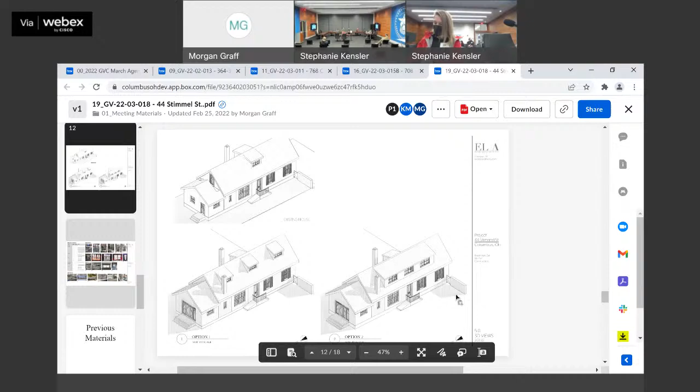Everybody's comfortable with that right now. Existing elevations are on sheet 9, elevation number 3 in the nest, bottom left corner. Looking at sheet 10, filling in the door opening, so be toothing in brick, try to match. There's not, it doesn't even look like there's a lintel over that elevation.

Sometimes what we'll do is leave the lintel in to show where the opening was, right? That way in the future, if somebody tries to go back and do it. I guess my other question would be, is there a reason why you want to keep that roof? Are you planning on changing the whole roof on that addition piece, or just extending it back to connect? Just extending it back, and then rebuilding it as needed, depending on the condition, when the roof is being repaired.

Only ask because sometimes we see these additions moving that pitch to get more matching in line with the existing pitch, not connecting like an extension, but tucking it up under the existing eave, so you have the same pitch, but that requires redoing the entire roof versus reusing the frame that's there currently. We're not requesting that, but we can consider it if that's something the commission would like us to consider. As of right now, we plan to keep that pitch, just matching the existing condition.

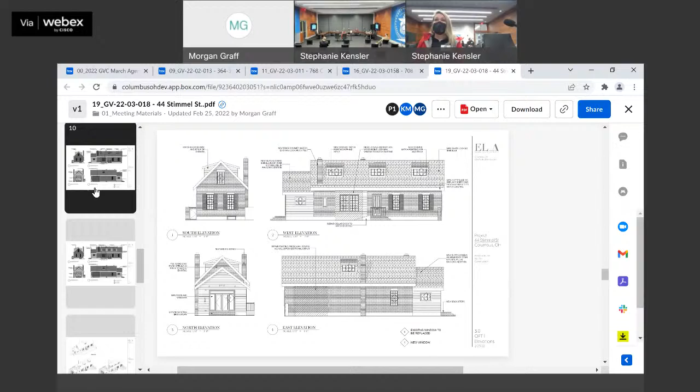I would agree, I'd want to keep that lintel just to show there is an existing something there. I'll confirm if there's a lintel above that door. I'm sure there is something there, I'm not sure if it's the stone lintel that we see on the rest of the house. I can't tell from my copies. Zoom into it. The Sycamore house that was on the applications before, that I had to recuse myself from, there are several wood lintels, exterior and interior on that. They're pretty darn cool.

It's too dark. Yeah, painted, right? Zooming in, it looks smooth, so it could be, but just check it. It's nothing we need to deal with right now. Okay, if it's there, leave it.

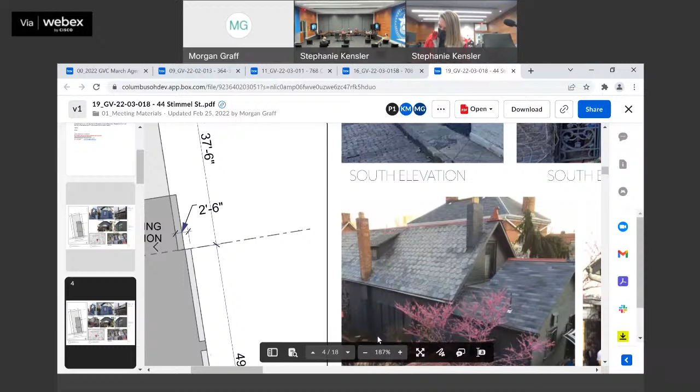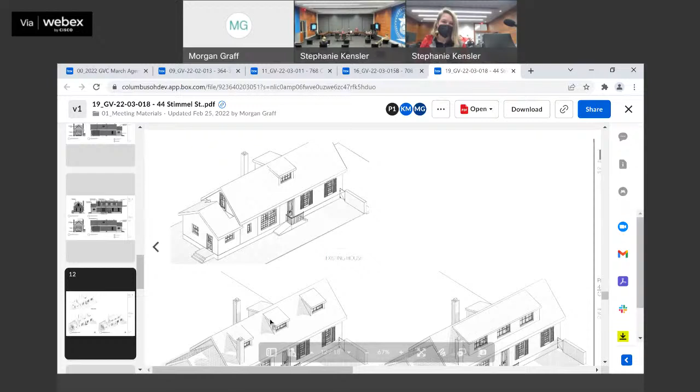Removal of brick chimneys, just one. Which one? It would be the one towards the rear of the house on the east side, next to the door/window/balcony. Correct, yes. It's missing from the upper left existing house diagram, but it is very close to that door on the east side of the roof. And then you're proposing a new chimney on the other side. Correct, and that would be masonry built in a similar fashion.

What's the purpose of the new chimney? Sorry, can you repeat that? What's the purpose of the new chimney? For a new fireplace inside. So the existing chimney that's there, the one you're talking about wanting to remove, that's near the, does it go to an existing fireplace? Yes. So you're moving the fireplaces. Correct.

Typically, we haven't allowed chimneys to come down. It's interesting that it looks like it's a different brick, or the brick's been painted or something like that. Well, that's part of the secondary addition. We had a big battle on Mohawk over a chimney on the back of that house. We know when that addition went on? I couldn't tell from the Sanborns.

Looking at the Sanborns, the first one's dated 1891, and the next one is 1921-22, and the configuration is different than the main house. But this one's got something stuck on the back, and then 1901, which is in there, is like the previous, like 1921. So it's like they tore a piece off. Yeah, that doesn't make any sense, you know?

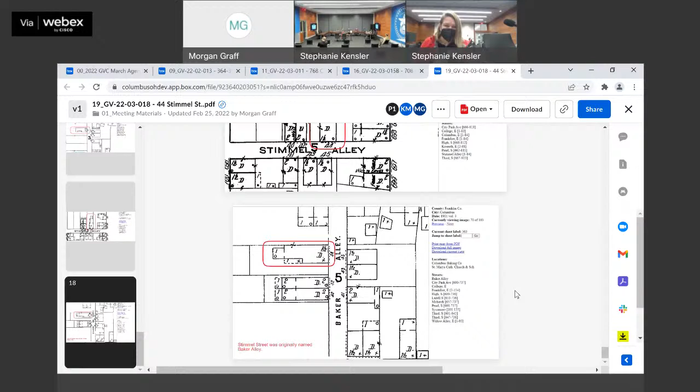We're trying to figure out if we can find historical evidence that that chimney is not an original chimney, which changes the conversation, because then it's not historic. If it is historic, then we have to think about whether it needs to stay or not. Thing about the Sanborn maps too is that roof, it doesn't match what's there now. The roof is all consistent across, right? With the notch, well, the notch is probably the side porch, and that little piece probably sticking out the back is where the pot was.

I'm thinking the main body of this house is what we're seeing in the Sanborns. All that's under the existing slate, basically.

Sounding like we might have a hard time with that existing chimney is what we're hearing here. So let's take that chimney and set that aside as a potential hurdle. If we approach this by keeping that chimney, is it just the exterior that needs to happen and then somehow we elevate that and hold it up structurally? If we want to remove what's inside the house, that has happened. Make sure it's done correctly so it doesn't fall later. Nobody wants that.

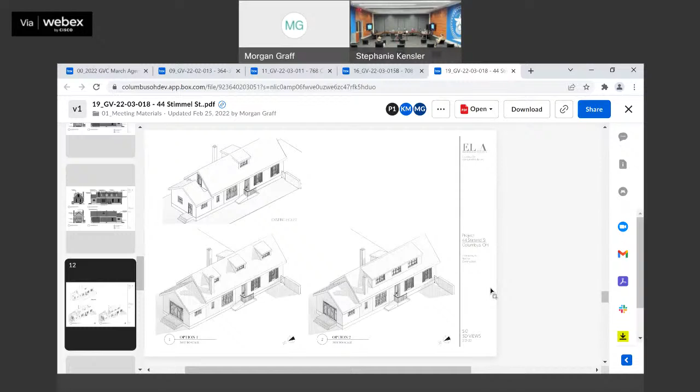Then the brickwork wouldn't need to be done. A lot of times it's the paint selections that are used. If it's a very impermeable paint, it could trap the water inside the brick wall. It's going to try to escape one way or the other. It can't go out, it's going to go in.

So if it comes down to finding out that's the cause, the applicant's open to the idea of some chemical treatments to try to remove the paint from the brick and put on a more appropriate paint, which would be a good idea long-term for the client. The water gets trapped inside the brick and the brick gets below freezing and spalls. Mineral paint's usually a better option, something breathable.

Yeah, the spalling's not too bad. You can do some consolidants on it too to kind of shore up that brick to make it solid again. Looks like in the pictures there might have been some bad grout point or something done along the way too. All that could be contributing to it. Just the wrong mortar, yeah.

Any more information you'd like from us? The window replacement, I don't know if that was discussed.

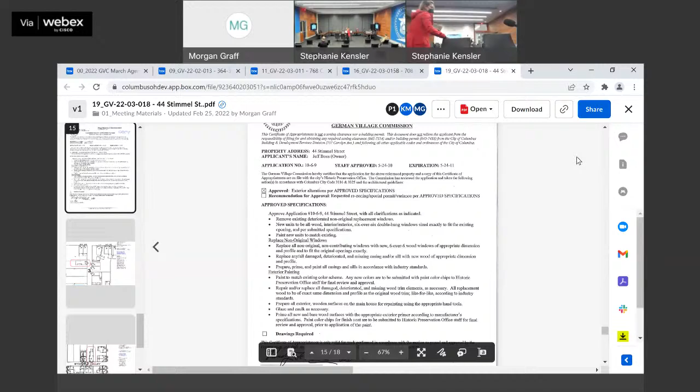Is there a motion to continue item 11? I so moved. Second. Okay, questions on the motion? It's such a minor thing, it's like a dryer vent, right? Yeah, yep, yeah.

All right, so we're gonna take that motion off the table. Is there a motion to approve as submitted? So moved. Second. All those in favor? Aye. Against? Ayes have it, motion passes.

I appreciate that. Last one is item 9, which is mine.

Button over there. I vote no. Gotta have a motion first. Do we like to make a motion? All right.

Please raise your right hand and swear to tell the truth, the whole truth, and nothing but the truth. I do, Anthony Harkey. Thank you.

I'm just gonna go over the proposed work description. Would commission like me to scan over staff analysis as well, or do you think we're pretty comfortable with this? I think we should follow procedure, to be honest with you. That is fine, just wanna make sure, Commissioner Field.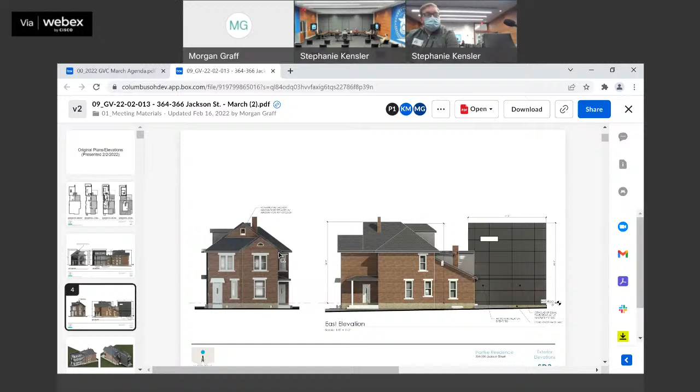Staff analysis, following is taken from the unapproved February 2nd, 2022, German Village Commission hearing minutes. Commissioner stated the partition wall between 364 and 366 seems too massive and strong. Applicant stated that the intention is to divide, but also is proposing a living wall or art wall, which is marked in red within the submitted drawings on the east side. Commissioners suggested applicants submit ideas of what was intended for the art installation. Commissioners suggested lowering the height to line up with the second floor roof line, as well as line up with existing eave. Applicant concerned with the third floor roof looking too boxy, like a hat.

Commissioners suggested to add larger windows to the top floor, maybe to carry those long vertical lines up from the second floor windows, or to make it all glass to make the third floor look lighter. Applicant stated that an additional staircase is being proposed within the wall. Because of the stairwell, applicant decided to keep the wall solid all the way up to the third floor.

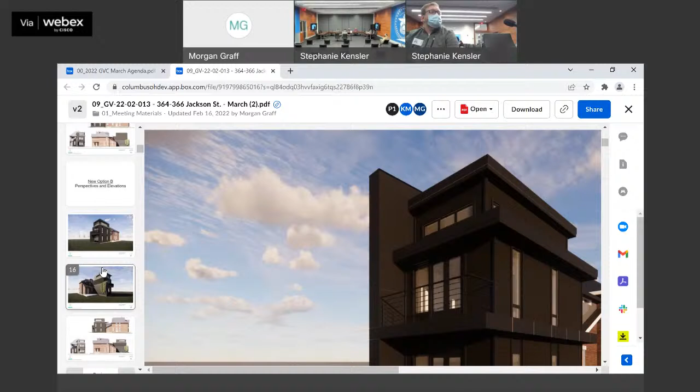Commissioners requested applicant to submit a 3D drawing of what the addition would look like at eye level. Commissioner Durst suggested to carry the third floor roof line through the wall as well, as a way to break up the mass. Commissioner McCoy suggested all proposed roof lines to carry through the wall. Applicant asked commissioners what type of foundation they would prefer for the addition. Commissioners agreed that a block foundation would be suitable for this addition.

So Harkey, do you have anything to add? Last hearing, we looked at the proposed design and got your feedback. We went back to the drawing board and provided the rendering of the original as per your request, and then proposed two additional options.

Option A maintains more of the vertical massing, speaking back to the original, but treating it a little differently by pulling back the wall on the second floor.

On option B, we took cues from the commission by pulling down that vertical wall, letting the third floor space be its own thing, providing more glass up there and opening it up. We'd like feedback on option A and option B.

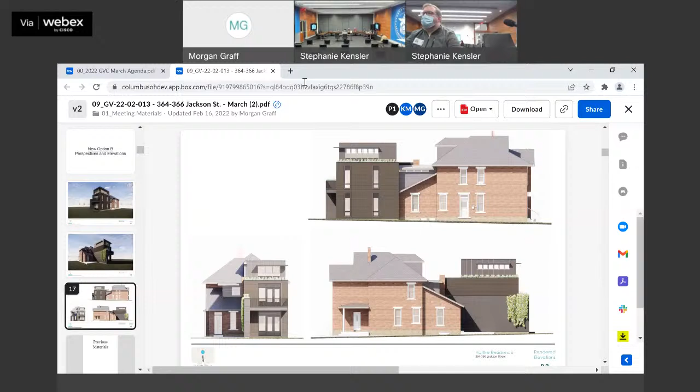Frank, do we have a second? Second. Thank you. All those in favor say aye. Aye. All those opposed? The motion carries. Nicely done, it's a nice project. Thank you, it'll be fun.